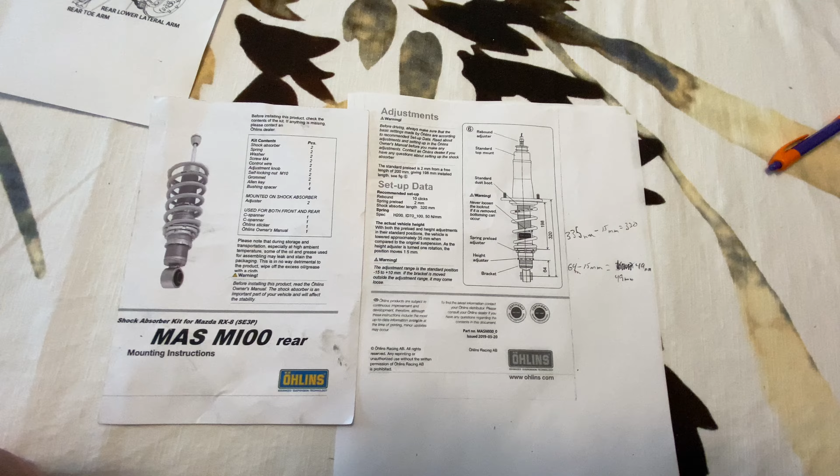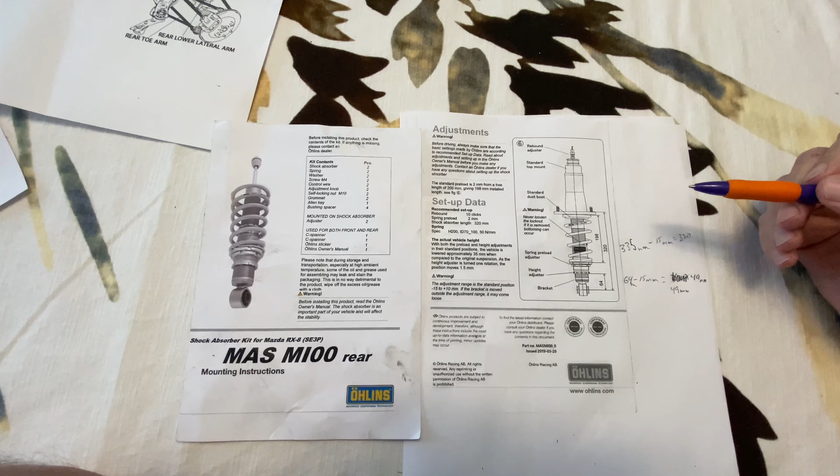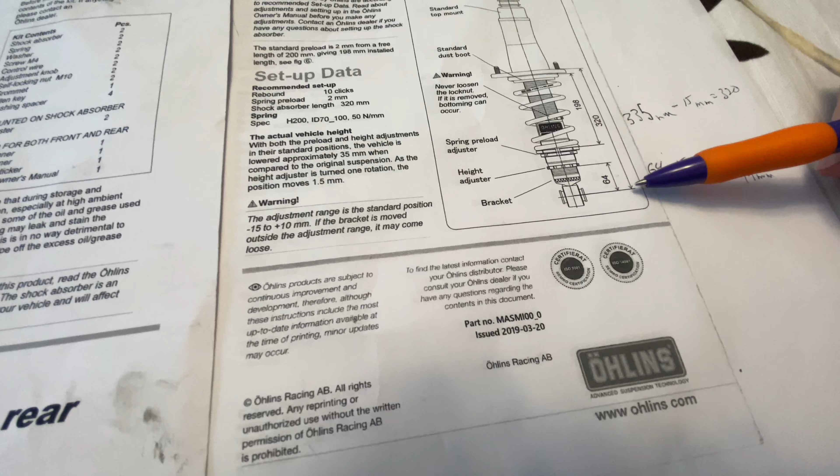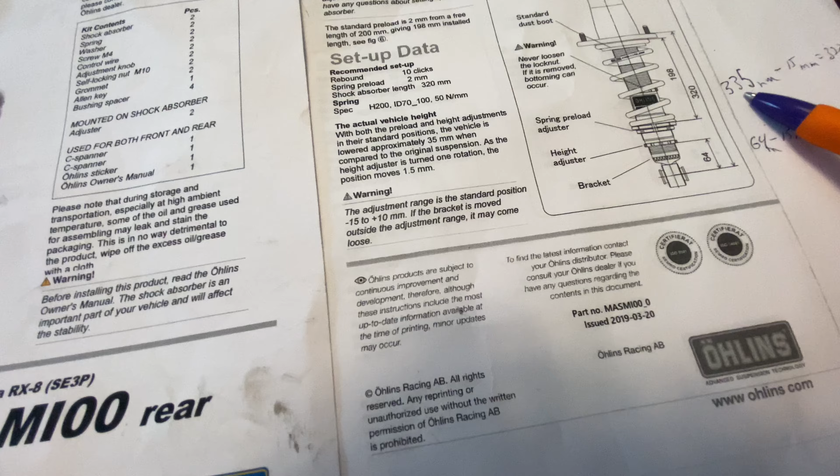They want to be able to explain to Öhlins, the maker of the shock, that there's a manufacturing defect. That defect, which will be presented in this video, is that you should be able to adjust from here to 320 millimeters. Now you can't on one of the shocks. One of these shocks is 335 millimeters and it cannot be adjusted. It doesn't come that way. There's no way you can turn this tube so it becomes 320.

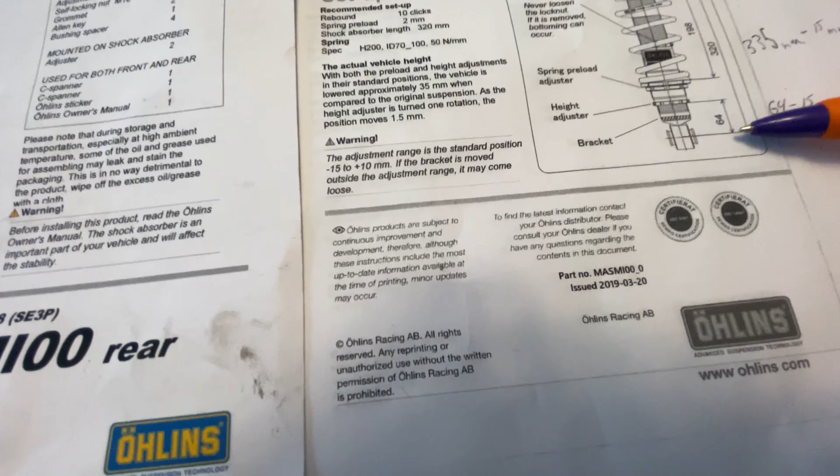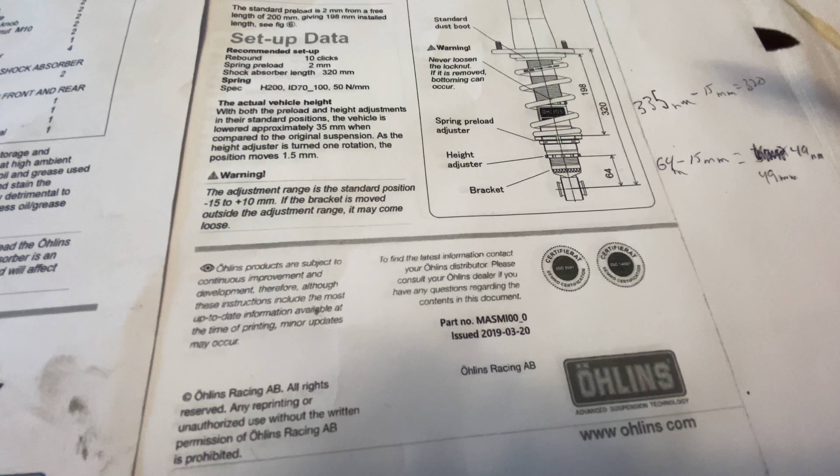So the only option is to shorten this distance from here to here, the height adjuster to the center point, to be 49 millimeters. Because one of the shocks works out perfectly. It's 320 millimeters here, it's 64 millimeters here. It ends up doing a ride height of 26 inches on the rear tire.

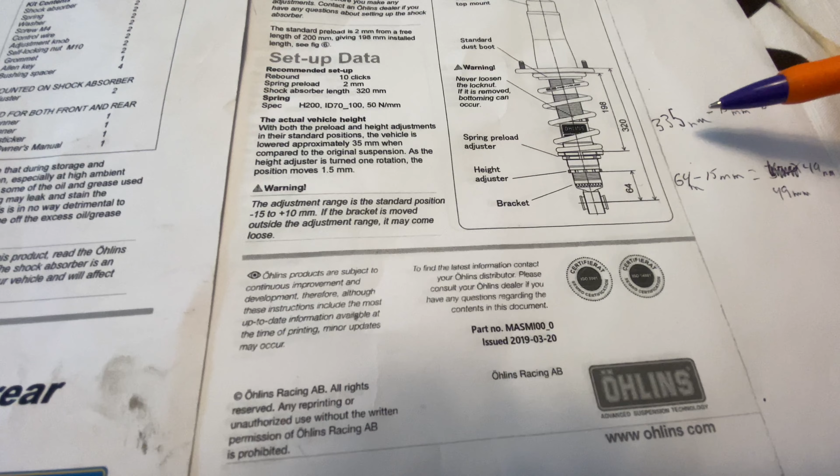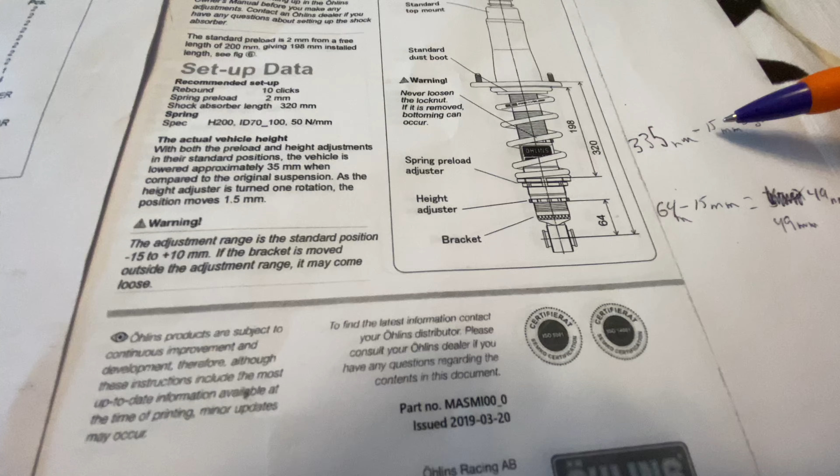The other side, if I put the defective or poorly manufactured one - it's a great shock, it's not broken - that only goes to 335. Here, if I put that on, I have to subtract 15 millimeters to get to 320. The only way I can subtract 15 millimeters is to shorten this distance between the height adjuster and the center point by 15 millimeters, which makes it approximately 49 millimeters. That brings the total length of the one shock that's 335 millimeters to 320.

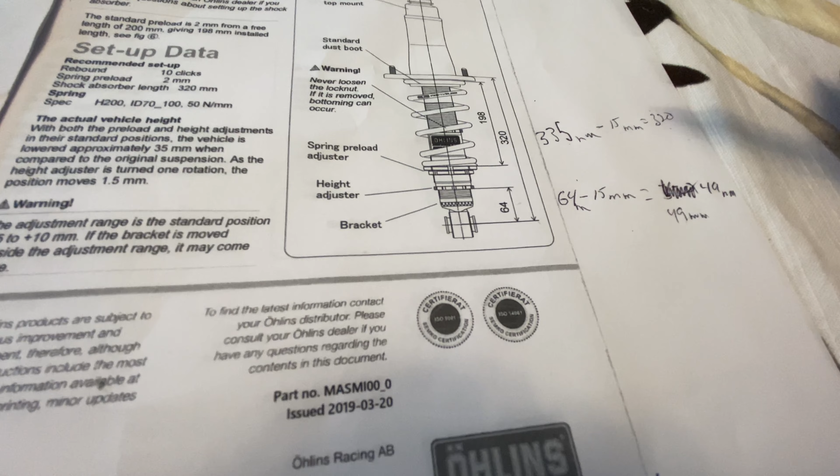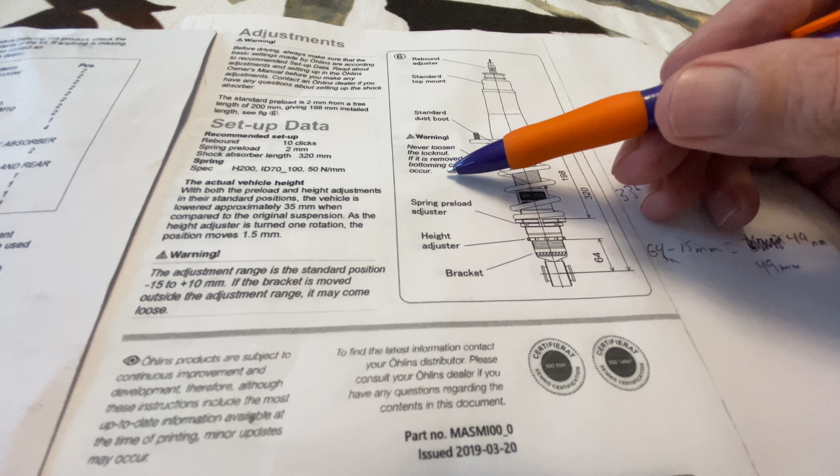And that ends up that the other side, which now has the flawed shock, it's now at 26 inches for the ride height. The problem is, and I sent a picture to Goodwin Racing, is if you see this, never loosen the lock nut - well, I had to loosen it because obviously this distance was 335.

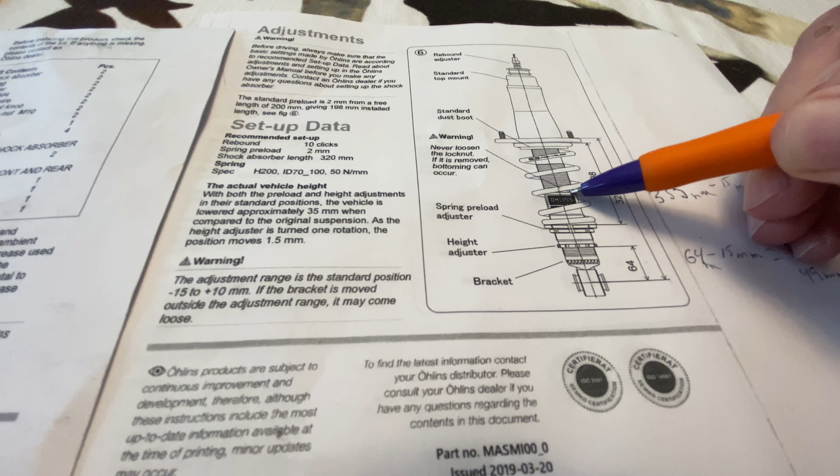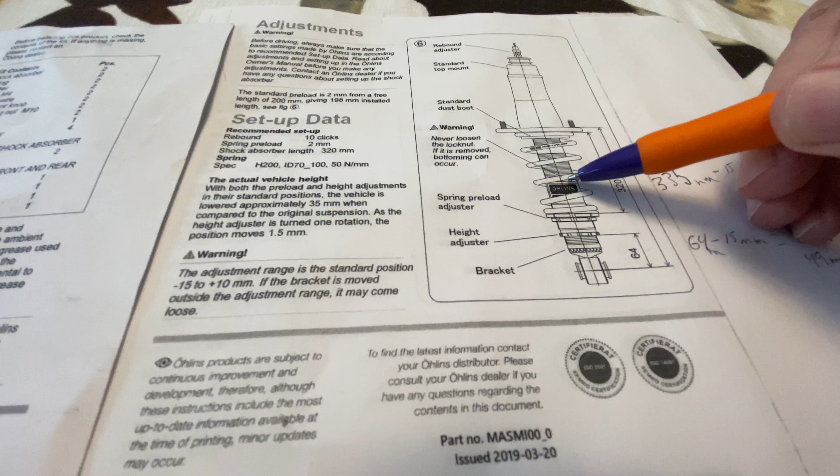Well, there is a machining mark that stops this so that it won't go, you can't bring it shorter. I, of course, retightened it. I only loosened it like a quarter of an inch to find it, but you can't get this tube here to screw up on this threaded area because there is a machine mark. It exists on both of them.

So now we're going to go out to the garage and I'll point out some of these issues. Let's get a tape measure. Oh, where did I put the tape measure?

Well, I'll bring this with me. It's always helpful to be able to show it. Sorry, this is a little awkward. I normally don't spend my time making videos on discrepancies between the lengths of Öhlins shocks, but I understand the need for it. I get why it's being done.

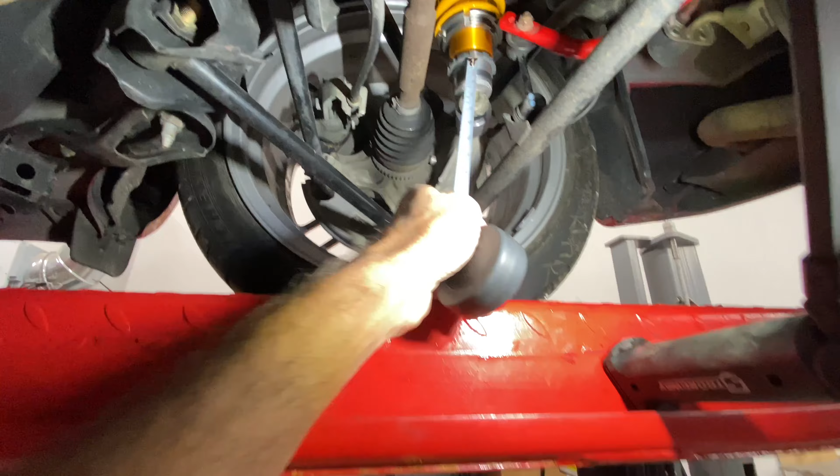I'll be right back. We're underneath the car, and I'm going to be measuring - let me show you - this distance from here to the height adjuster. It is supposed to be 64 millimeters. And we'll come back and we'll look. And guess what it is?

It's 64 millimeters. Now, given that the side I'm about to show you was 335, in order to get it to 320, I had to subtract 15 millimeters approximately from the height adjuster part. So I'll show you that part.

And if you look at this, voila. Try to get it in there. It's a little hard to do sometimes, but it is - 15 millimeters approximately has been subtracted from the 64 that's normally supposed to be from this spot here down to the center line here. And that was required because the shock can't be reduced to 320 without subtracting 15 millimeters from this spot, because it isn't 320 here, it's 335 on this side.

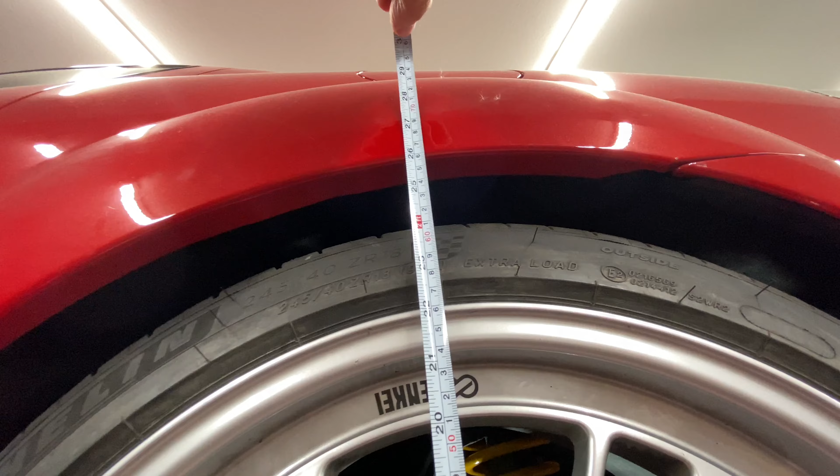Now we'll take a look at the height. Notice that this is 26 inches, which is the side which I had to take 15 millimeters off the height adjustment. And then come over here.

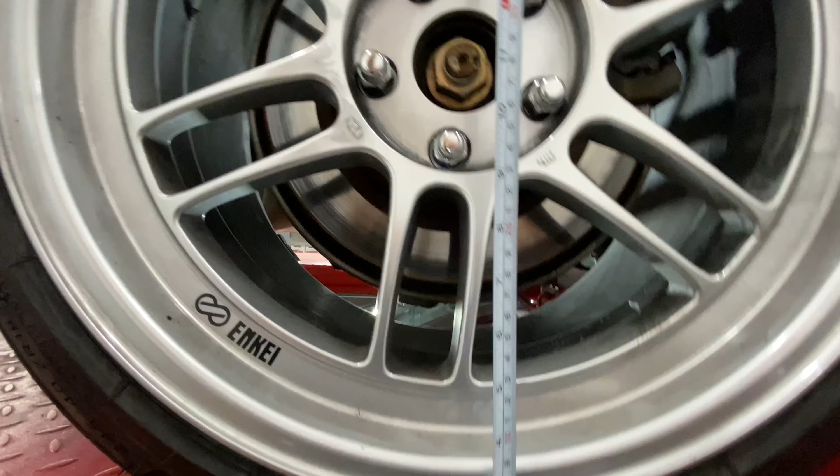And we'll do the same thing. And it is 26 inches. So there is a defect in the construction of the shock on this side.